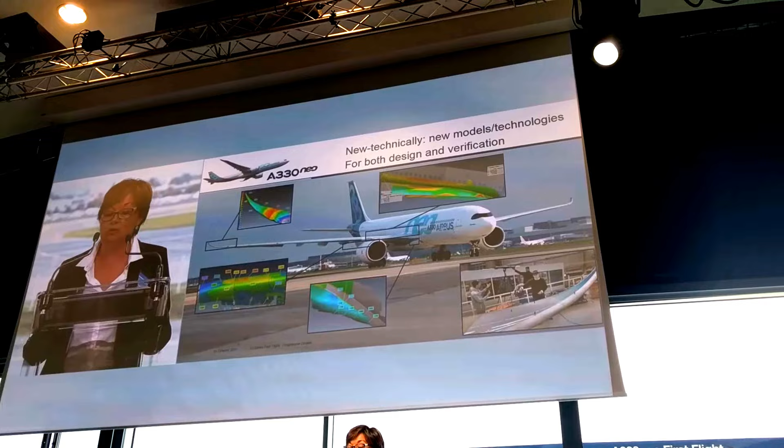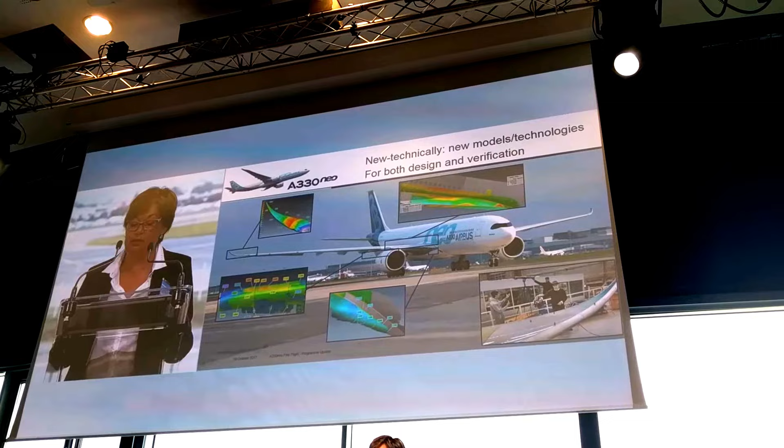What is important is that for the design of all these elements, we have made the best use of the latest technology available to optimize an already robust design. In particular, for the aerodynamic performance, which is key to contributing to the overall performance of the aircraft, we have used the latest models that were used on our latest development for both computational design and for verification.

You have some pictures here that show and illustrate the work that was done by the team to optimize the aerodynamic integration during the design phase. You have the sharklet, you have the pylon, the over-wing fairing.

And we have used as well 3D scan technology to validate the produced component. This is a picture you see on the bottom right, to validate those produced components against the theoretical shape. The result is that we have successfully validated all our components, and the aircraft that you have seen today is exactly the one that the engineers dreamed of 3 years ago.

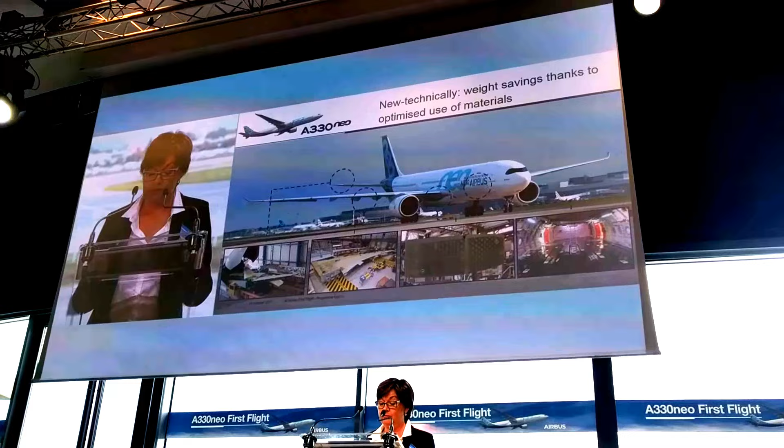Besides, for the rest of the airframe, we have optimized the use of material and technology to gain up to 600 kilos of weight saving. I will just briefly mention the introduction of composite materials such as lighter glass fibers or new carbon fibers for horizontal tailplane or for the floor panel.

We have also used lighter aluminum for the wing or the fuselage panel. And you have also the picture of the rib one, which is at the junction of the fuselage and the wing, for which we have used a new way of machining, so-called isogrid, leading to a significant weight saving. Overall, we have weighed our first flight test aircraft that you have seen this morning, and it is fully in line with our prediction. So the weight target is achieved.

In parallel to the product that I have just highlighted, I would like to give you a few industrial aspects. We have produced nearly 1,400 A330s. So we have today a robust and proven industrial setup for both our sub-assemblies and for the final assembly, and we have also an extended network of suppliers all over the world.

So we are taking advantage of this current setup to also invest massively for the future. It starts by upgrading our FAL station, as you can see, to be able to suit the NEO build, to install the new propulsion system, but also the new sharklet, and to allow the capability to produce both CEOs and NEOs.

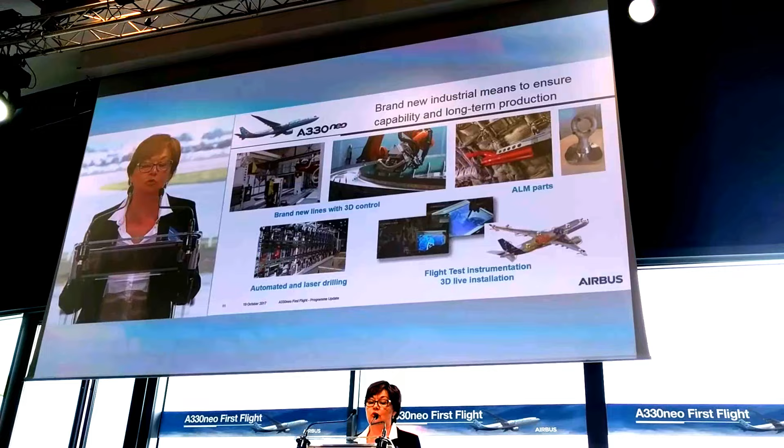Those new lines take benefit of the latest technologies in terms of automation: pulse line, automatic drilling, automatic panel laser, three-dimensional control cell. For all the other lines, we have upgraded them and invested in automation innovation for quality enabler, to reduce the variability and make sure that we reduce the probability of non-conformance. We have introduced laser drilling or grinding robots.

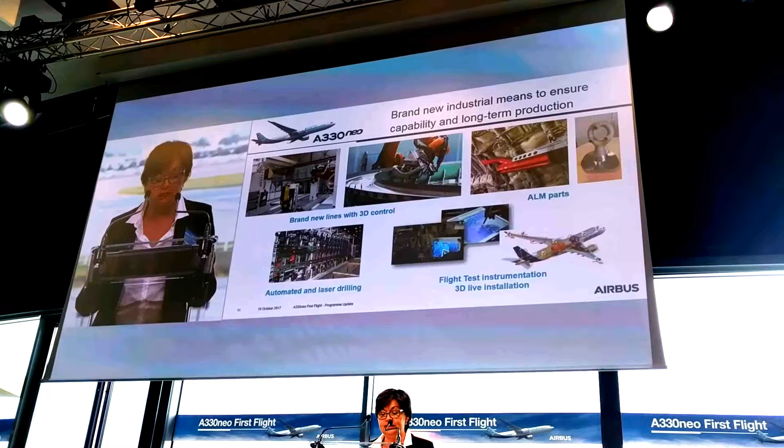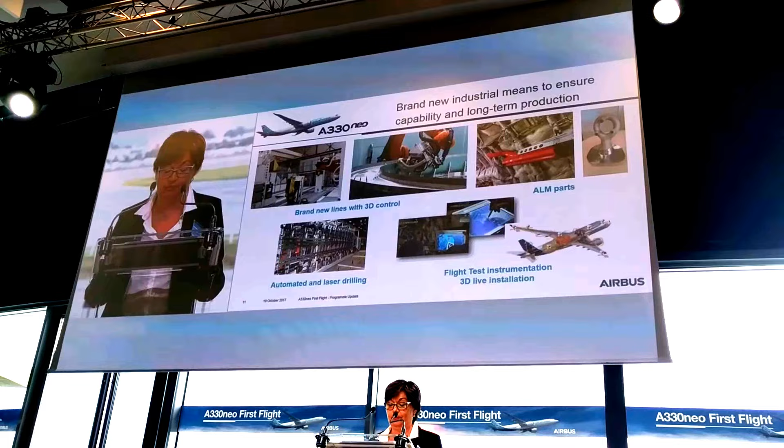Finally, we have also implemented innovative processes to gain in agility and responsiveness, like the use of 3D printed parts and the use of 3D drawings for the flight test instrumentation, with the objective to get rid of the paper to go faster.

Finally, we have also innovated in our ways of developing, and this was done building on the experience that we have had on our previous developments. We have the chance to arrive after A350-900, A350-1000, A320neo, and learning from them, we have naturally invested into the quality and maturity very early in the process and at every stage of the development. And the key word for me is anticipation.

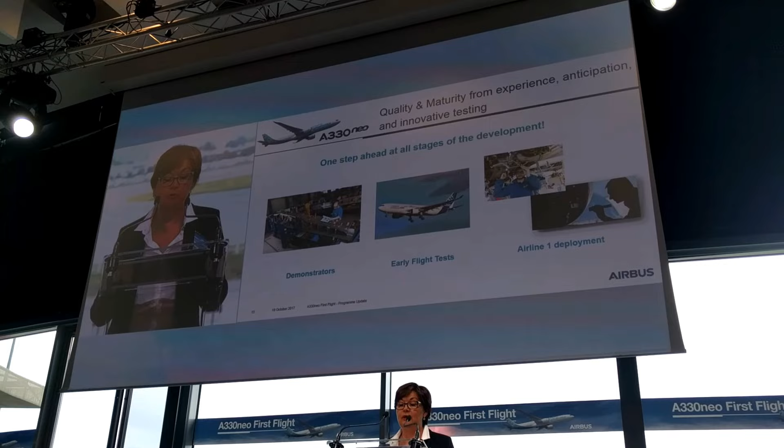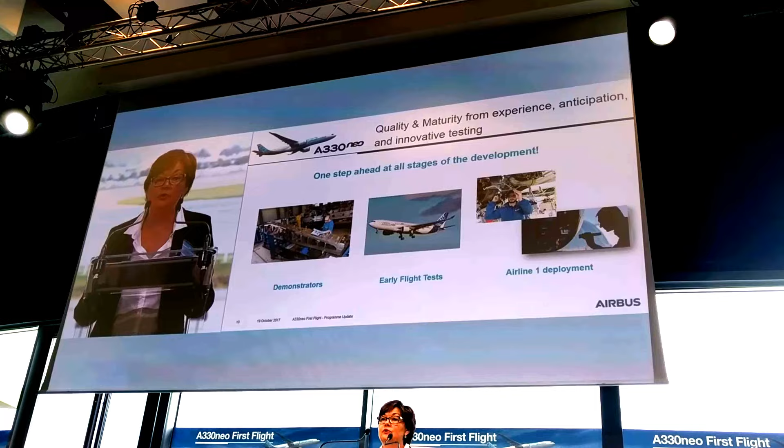The objective with anticipation is to be always one step ahead at all stages of the development. And in the early phase, we have extensively used demonstrators to validate the industrial processes for our new components, and it enables us to launch production as early as possible.

Last year, we took the opportunity of having an A330 CEO flight test aircraft, and Patrick will come back on that, to test in advance some of our upgraded systems and some of our cabin components. And now that we are entering into the flight test campaign, we have deployed the Airline One concept that was already deployed on the A350, to approach each flight from an airline perspective. And of course, the ultimate goal of working like that is to find quality and maturity items before the entry into service of the aircraft.

Well, in conclusion, we have a fantastic aircraft, and we are here today a little bit over 3 years after the launch, but obviously it's not finished. We have in front of us to kick off the flight test campaign. A second flight test aircraft is getting ready and will fly next month. We have our third flight test aircraft, which is a Dash 800, that will start the FAL next month as well and will fly next year.

The first production aircraft are already ongoing assembly, and we are targeting type certificate and first delivery in the middle of 2018. So we have still plenty of exciting things in front of us. Thank you very much.